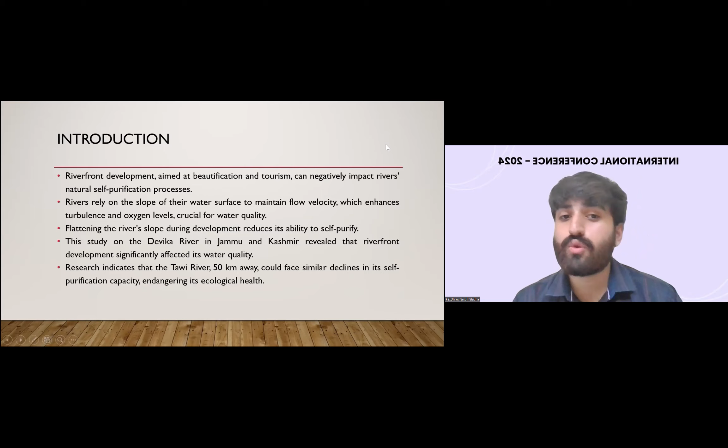See, riverfront development aims at beautification and tourism, which is negatively impacting the river's self-purification capacity. Every river has its own tendency to purify itself. But due to certain developments, due to change in the natural slope of the river, it is being degraded. Rivers rely on the slope of the water surface to maintain its flow velocity, which enhances the turbulence, and hence more the turbulence, more the oxygen level, which is very crucial for water quality. Flattening the river slope during development reduces its ability to purify itself.

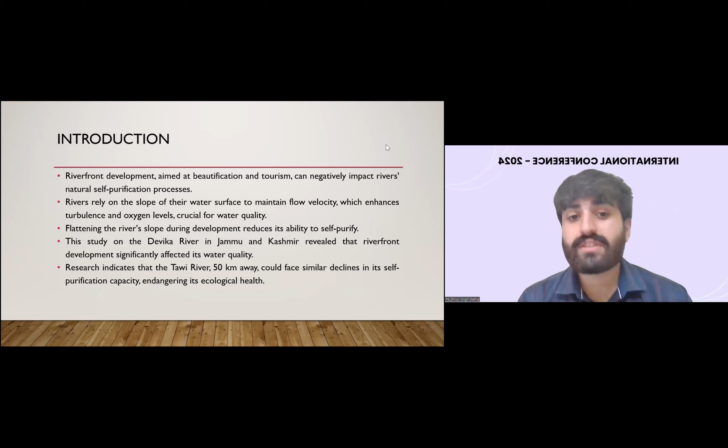This study is based on the Devika River, which is present in Jammu and Kashmir, and with the research results of Devika River, we predicted what will be the effects on another river, Tawi, which is 50 kilometers away from the parent river, which could face a similar decline in self-purification capacity, endangering its ecological health.

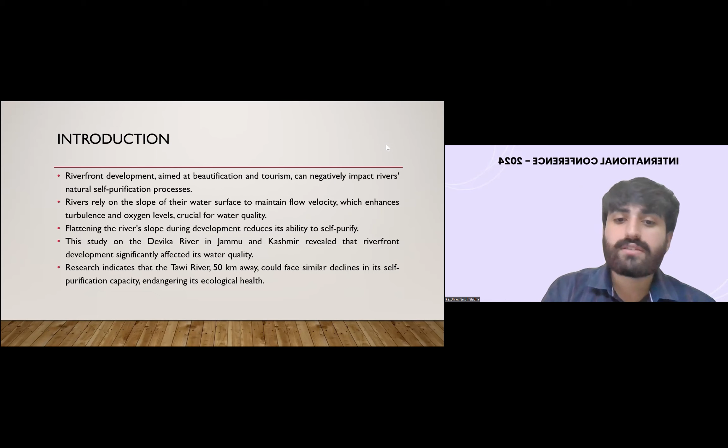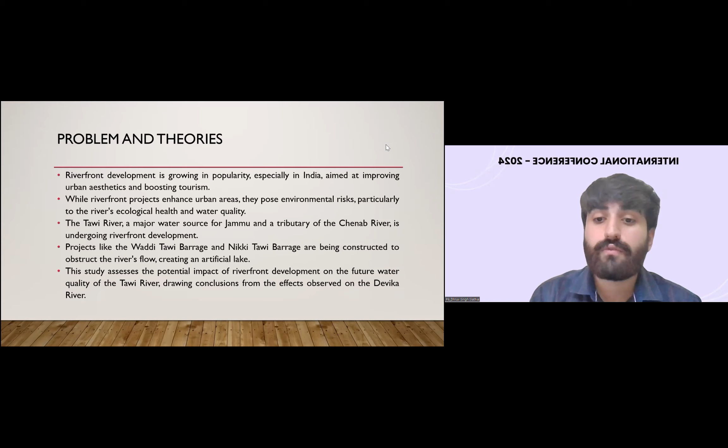Now, riverfront development is growing in popularity, especially in India. While riverfront projects enhance urban areas, they pose environmental risks, particularly to the river's ecological health and water quality. The Tawi, a major water source of Jammu and tributary of the Chenab River, is undergoing riverfront development. Projects like Waddi Tawi Barrage and Nikki Tawi Barrage are being constructed to obstruct the river's flow, creating an artificial lake. The study assesses the potential impact of riverfront on the future water quality of Tawi River, drawing conclusions from the effects which are already being observed on the Devika River.

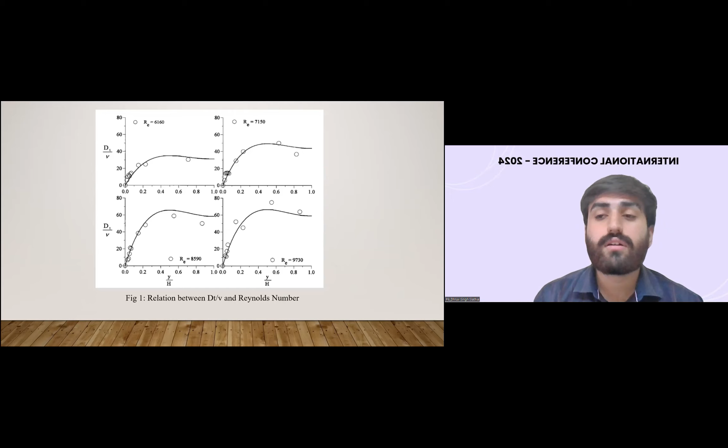As you can see in this graph, if we keep the value of y by h constant, with increase in the Reynolds number we can see the increase in the value of the turbulence coefficient, from which we concluded that the turbulence is directly proportional to the square of the velocity. Thus, with decrease in slope, which can happen due to riverfront development, the turbulence can decrease, and thus the overall self-purification capacity of the river will also decrease.

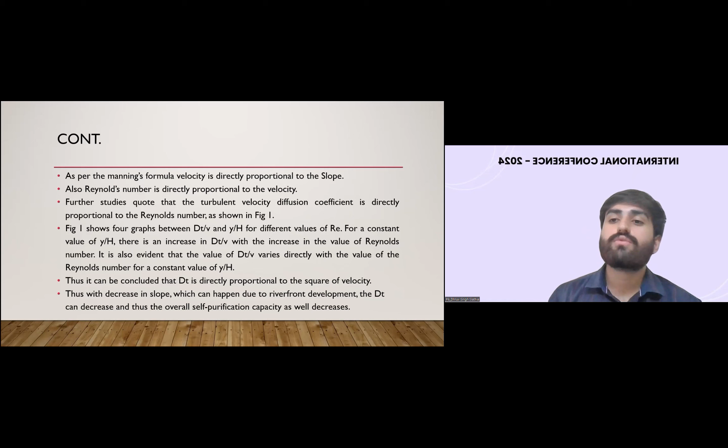Now, what we did, we took two rivers side by side, that is Devika and Tawi. Two parameters were considered, that is longitudinal slope and the water quality parameter, from which we checked the DO, dissolved oxygen levels, and BOD, biochemical oxygen demand levels. Three samples were taken from the location of the riverfront, in a stretch around 200 meters long, and one sample was taken from 2 kilometers upstream of the riverfront development, which has an undisturbed natural slope.

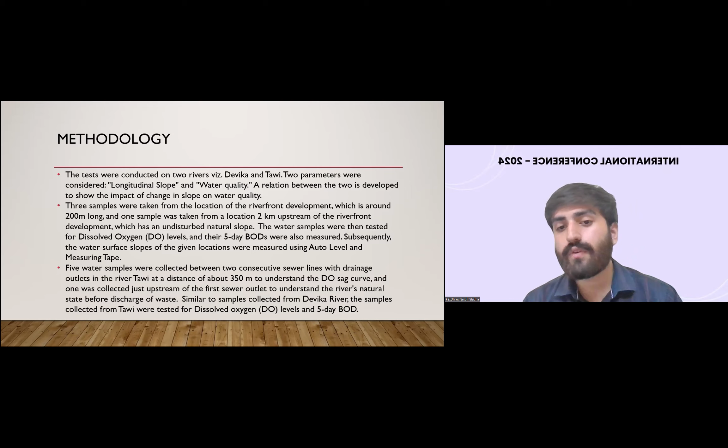The water samples were tested for dissolved oxygen levels and their 5-day BODs. Subsequently, the water surface slopes of the given location were measured using auto level and measuring tapes. 5 water samples were collected between two consecutive sewer lines with drainage outlets in the Tawi River, at a distance of 350 meters, to understand the DO sag curve, and one was collected just upstream of the first sewer outlet to understand the river's natural state before discharge of the waste.

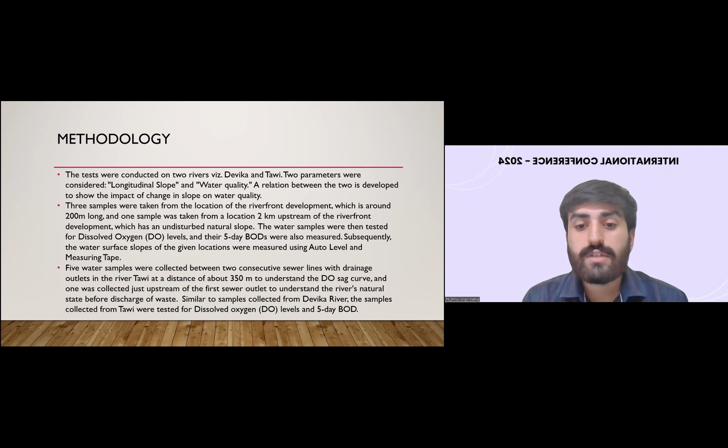Similar to samples collected from Devika River, the samples collected from Tawi were tested for dissolved oxygen and 5-day BOD. Now here are the test samples of the Devika River. See, gentlemen, the places where the slope alteration was done, riverfront development was done, their slope has decreased to 0.97%, 0.77%, and 0.77%. It is the average of the three tests.

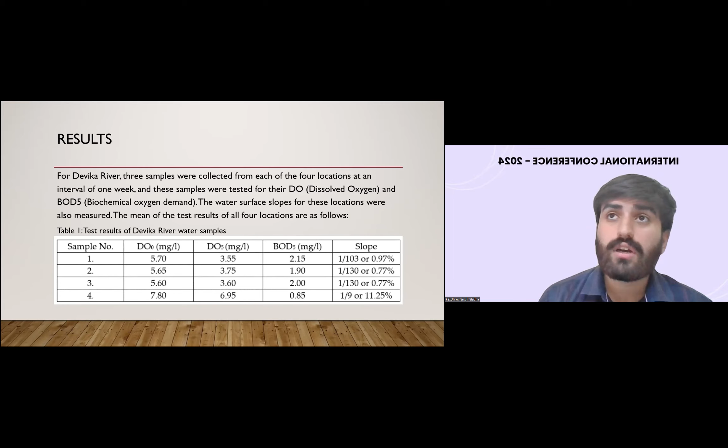Now coming to the results of the Tawi River. In Tawi River, as I have already mentioned, we took the two sewer lines and between them we measured the DO levels. Tawi River was inspected for the DO and BOD5 and the water surface slope was also measured. DO levels were taken between the two consecutive sewers from 6 locations at an interval of 1 week. And for each location, 3 samples were collected and the mean of which is shown in this table.

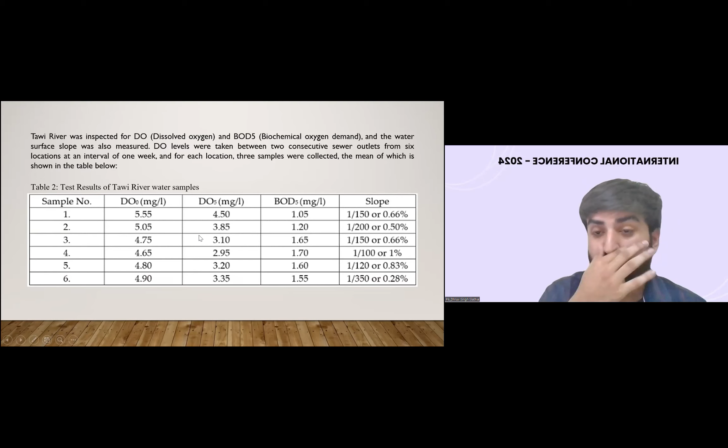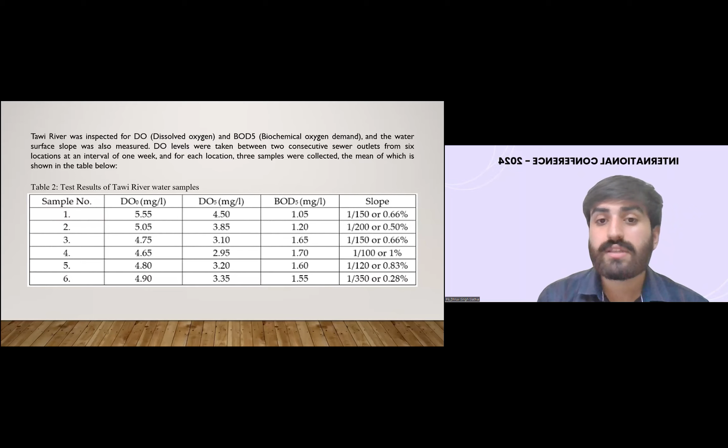As you can see, DO levels decrease when we move forward with the river. It is just because of the organic material which is present in the water; the microorganisms will utilize the dissolved oxygen present in it to decompose that material. That is why there is decrease in the DO level. From the above graph, it is very clear that the river is unable to replenish its dissolved oxygen levels.

As I have mentioned earlier, the river has its own self-purification capacity. And in case of the Tawi River, it was unable to replenish its DO levels between the two outlets, even in the natural conditions. So if even in the natural condition the river is not able to replenish its oxygen levels, how can we say that it will replenish its oxygen levels when it undergoes the riverfront development projects? So it has lower self-purification capacity than required due to insufficient slope of the river, which once the riverfront is completed is expected to be worsened due to backwater curve.

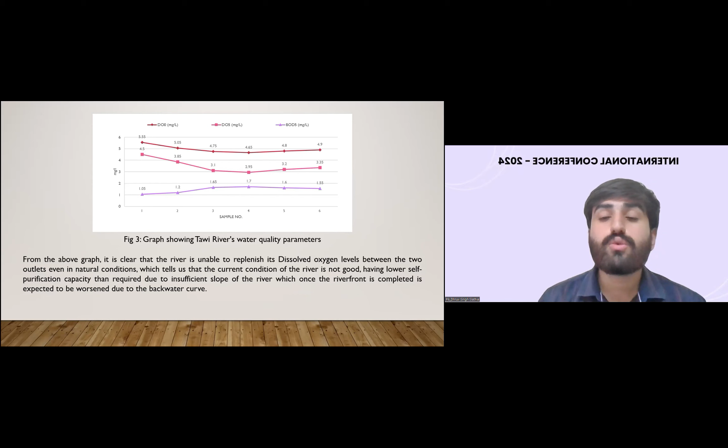And from this, we conclude that the slope of a river significantly impacts its self-purification capacity, with steeper slopes leading to better water quality. The study examined two rivers, Devika, post-riverfront development, and Tawi in its natural state. Riverfront on the Devika flattened its slope, reducing water velocity, lowering the water quality and its self-purification capacity.

Whereas the Tawi River, already showing poor self-purification due to an insufficient slope, could face further degradation if a barrage is built, flattening the water slope and reducing oxygen levels, critical for aquatic life. Developing a barrage on the Tawi River could result in water stagnation and poor water quality, defeating the purpose of enhancing the river's aesthetics through riverfront development.